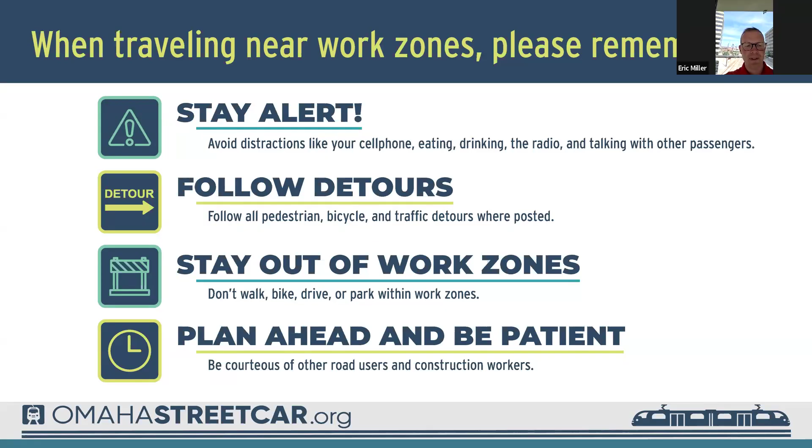As far as the Streetcar construction schedule, we're getting to the end of utility work on the west end, getting into utilities on the east end. Harney Street Bridge over I-480 should be done by the end of the year, and we'll start on Farnam Street Bridge after that. And I think most exciting coming up is the mainline track construction that we're planning to start early next year.

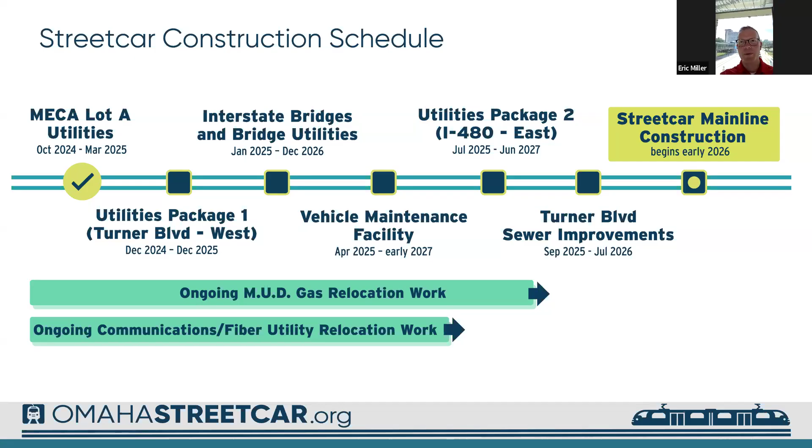So now I will turn it over to Megan to discuss the MUD work. Good afternoon, everyone. So our first slide is our phase 6 in the Old Market.

Gas main installation work continues on 16th. We anticipate this to be completed in the next 2 to 3 weeks. Then all available street repairs will be turned over to the city. Gas is available on the new main to 16th Street, so individual gas services can be reconnected to the new main. The service reconnection work may include additional excavations along the route. MUD continues to work with customers to relocate gas meters to the exterior of buildings for safety reasons. This phase's anticipated completion for main installation remains around mid-September, so gas service work could continue for a while as we work with our customers.

After all services are reconnected to the new main, the crew will come back to cut off the old main, which may include new excavations. As shown on the slide, new excavations will be dug east of 11th in Harney and Farnam to cut off the old main and an old service. Each excavation's work should take a couple of days to complete. Then we'll turn the street repair over to the city.

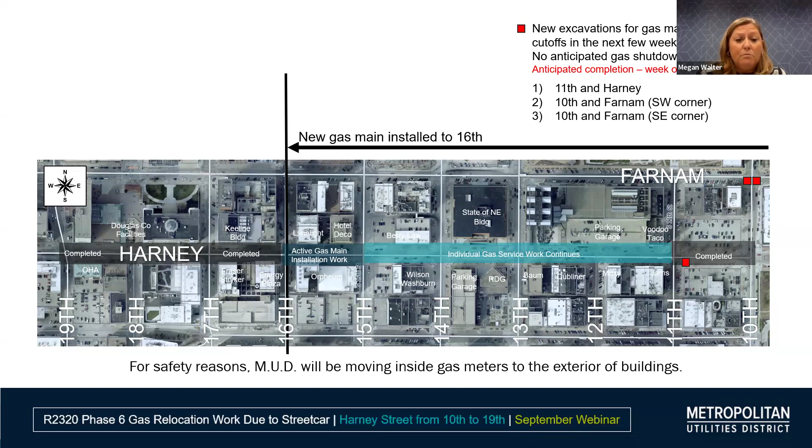Our second slide is phase 5, Farnam Street. The crew at 16th and Harney will move to Farnam at 24th Street within the next month and continue working in phase 5 until completed. Traffic control measures will be put in place for this future work.

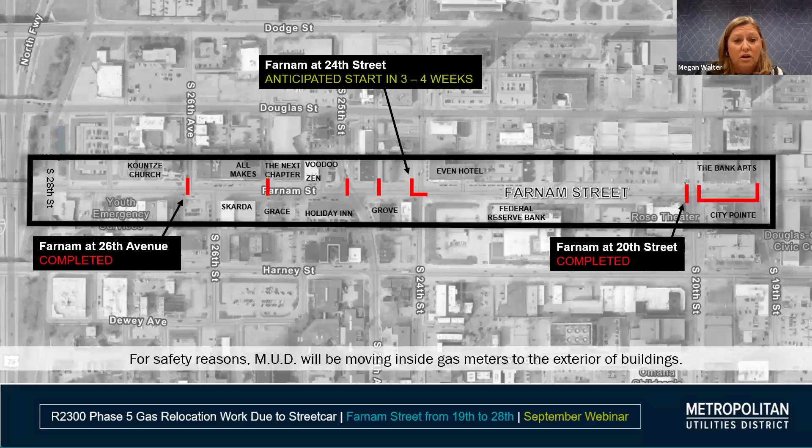Our third slide is phase 7 on Harney Street. Gas main installation work continues near the west end of this phase and will continue east to 24th Street. All individual gas services from 19th to 28th Street will be reconnected to the new main. For safety reasons, again, we will move all inside gas meters to the exterior of buildings.

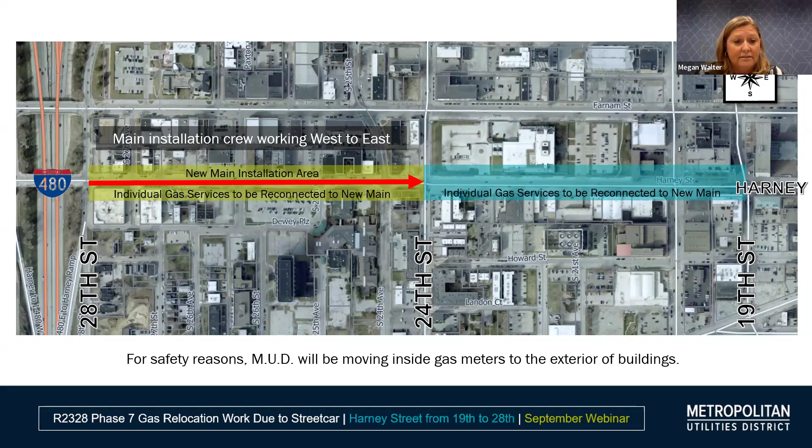Finally, our last slide is a look at all of the phases. Phase 6 gas main installation is anticipated to be completed mid-September. However, gas service work will continue. In phases 5 and 7, MUD work will continue in selected areas, primarily in intersections, to stay ahead of the city's future planned utility work. As shown on this slide, areas shaded in gray represent work completed, while red areas indicate active work zones.

Phase 8 is going to be scheduled at a later date. For safety reasons, pedestrians should use caution where holes have been dug, and vehicles should slow down in construction areas. Thank you.

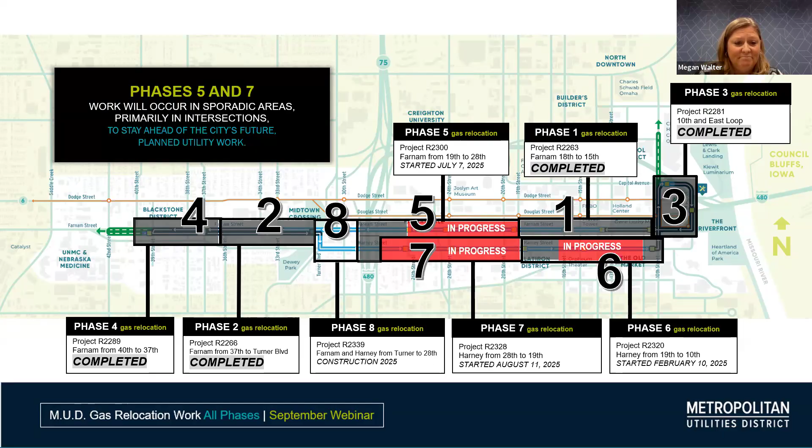Thanks, Megan. Now, vehicle maintenance facility is rolling along fine. We're done with all of our deep foundations. There's 2 photos on the screen right now. Those are some cylindrical piles that have been filled, and you can see them setting up for their first large mat slab pour that's going on.

You can also see in the photo on your right part of the interstate, and behind, roughly a little bit back and to the right, would be the luminarium. Vehicle maintenance facility is continuing along and should be ready to receive cars when they start showing up in 2027.

I believe we also have a question related to the vehicle maintenance facility, Wendy? Yes, the location of it. Okay, yeah, so this is down along Riverfront Drive. It's been moved and is now just east of it, and it's kind of catty corner to the luminarium as you're looking out from the parking lot. Out and a little bit to the south is where the vehicle maintenance facility will be sitting.

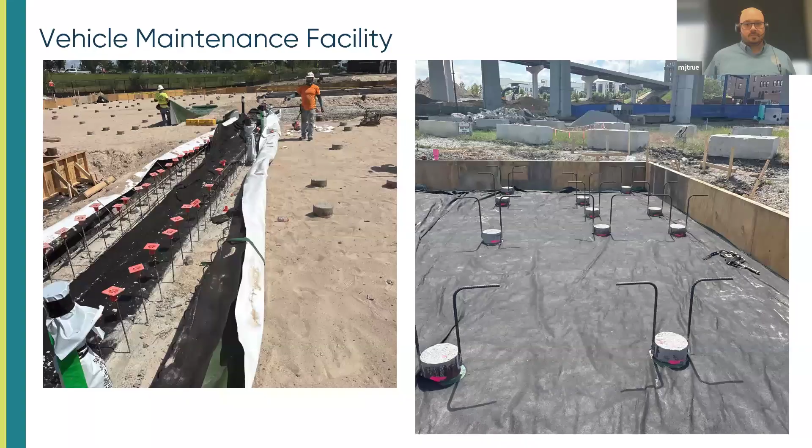Awesome, thanks Mike. So moving on to the West Utilities package. I'll cover this, the bridge, the East Utilities package, kind of all the projects that are active at the moment. So West Utilities package, again, we started way back in January down at Turner.

We're moving west down Farnam. So there's been pretty regular restrictions. We're just seeing a continuation of the same work, similar types of work that we've seen throughout, right? So westbound traffic only on Farnam from 34th through 38th Ave right now. Be aware for traffic restrictions, be aware for lane closure changes.

There's no parking through here, so we want to utilize the parking garage between 37th and 38th. There's the new parking lot at 40th and Harney that has the on-street rate, or if you're at the east end of this area, you can utilize that parking garage. There's the 2 parking garages kind of off 33rd and Farnam there. You can utilize both of those.

Work that we're doing through here, we're continuing to do sanitary and water main work, very similar to all the work that's occurred on this project so far. We are looking to wrap up phase 2 here in the next week or so and really start making that push. You can kind of see we're already extending west, making that push into that last final phase 3. This project's looking to wrap up at the end of the year here.

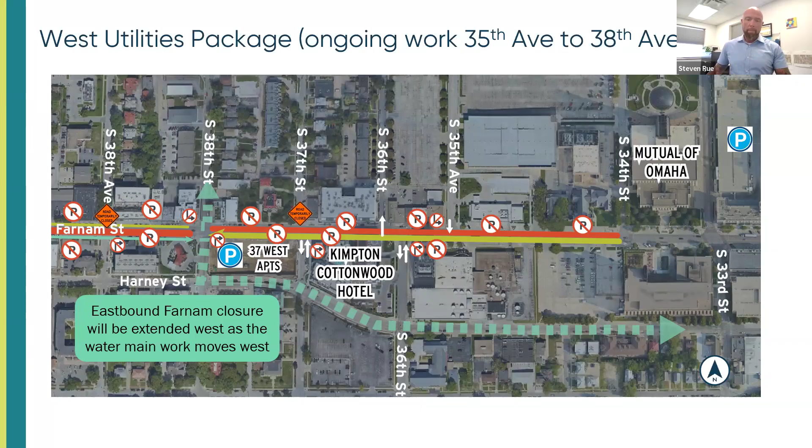The bridge package right now is going great. We're working on finishing up the Harney Street Bridge, which is scheduled to be finished by the end of the year. We're definitely on schedule for that. If you drive by, it looks more like a bridge at this point - it's been paved, we've got the deck, and we're starting to put the appurtenances on. So in the next couple of weeks you'll start seeing barrier rails, fencing, and foundation poles for the street lights. Those things are all coming.

Other work occurring over here: we were able to get the duct banks underneath the bridge that take OPPD and telecommunications from one side of the interstate to the other. Those are complete, so you'll start seeing a lot of wire pulling out there with OPPD and Lumen specifically pulling their cables across the bridge. We've also finished the work at 29th and Harney, so you can resume getting on the interstate there. We've completed that.

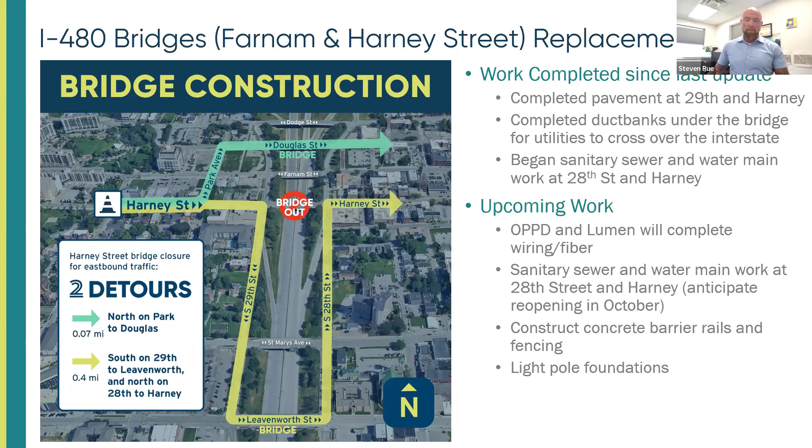Coming off the interstate at Harney, we're not quite done with that yet. We're doing the joint sanitary sewer water main work right there at 28th and Harney, and we're anticipating that to be finished up and opening that intersection sometime early to mid-October. But this project's going great - if you drive by, you can see it's getting near completion.

Then the east package - this is our newest utilities package that we started, and it's also the largest package we're going to do through this series of utility packages. They started on 10th and Capitol. If you've been in that area, you've seen Capitol was mostly shut down. We were critically able to get one northbound lane of traffic open, so when the Lincoln Park concert happened last week, we were able to get all those semis in there for everything they needed. That was great, but we got that done.

On Dodge or Capitol right now, we're looking at wrapping that up in the next week and a half, and then they're going to move up to 10th and Dodge. There'll be additional closures there as they continue the same water main and sewer work progressing towards Dodge - that's one crew working this project. We have another crew starting at 10th and Farnam, which is their next heading for this project. That starts next week, and we should start seeing some lane closures. The following week after that, I believe the whole intersection will go into a full closure, and I think we show that on a later slide.

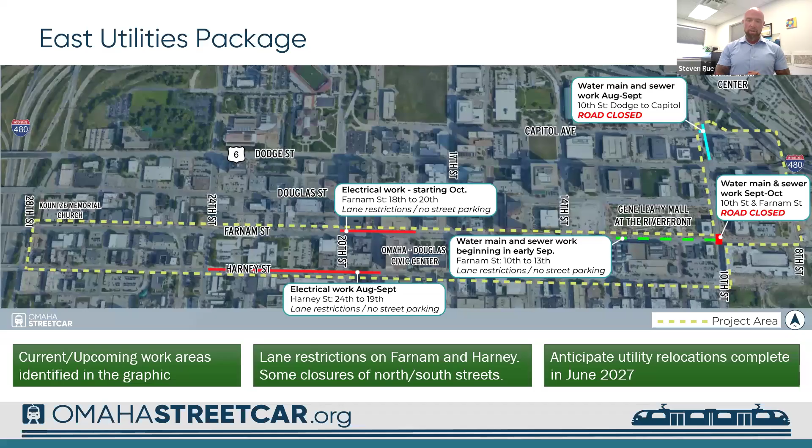From there, you'll see the first crew make their way around this loop and finish this rectangular dashed line area, working around and completing that work. This other crew at 10th and Farnam will start there and work their way west. Eventually, as this project goes on, you'll see work start here at the east end and work its way out west, very similarly to what we did on the West Utilities package. Other work occurring in this same area right now includes electrical work happening closer to 18th, 20th, 24th, 19th on Farnam and Harney - that needs to get done ahead of the utilities package as it moves west. This is going to be a really busy corridor for the next year and a half or so as we try to get a lot of work done through here ahead of the mainline track starting to move in 2026. So a lot of work to do through here.

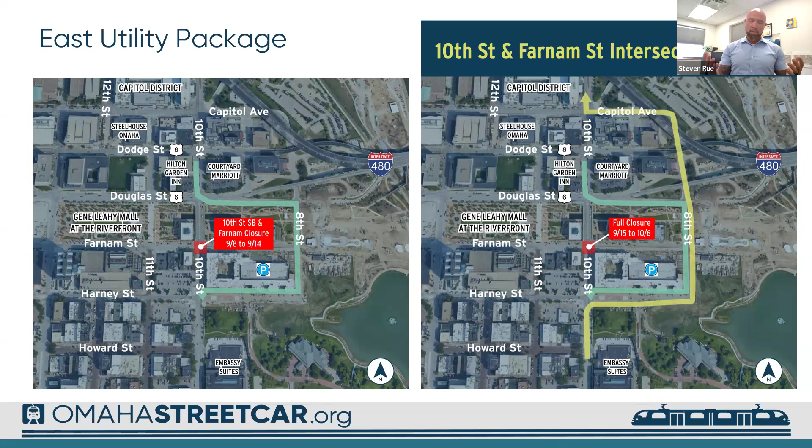We have some diagrams showing anticipated closures and detours. This has been a tricky area, especially trying to get back into the loop that goes towards the Luminarium. We've had some issues trying to get north on 10th, things like that. Here we have the full closures posted, and these are our suggested detours to get around, utilizing 8th Street, working your way up to Capitol, depending on where you're trying to get. Use these detours and your best driving skills as you're going through. If you're driving down a street and there are 4, 5, or 6 signs saying the road is closed ahead, it is likely closed ahead. So use other detours, follow detour signs, do those things that we do.

I'm going to let Mike talk about this one, as we're not quite to construction yet.

Thank you, Steve. This is the Turner Boulevard package, particularly from Farnam Street down to Harney. There are several deep sewers in this area, along with a 48-inch water main transmission line that we're going to start later this year, and it's supposed to be wrapped up by Q3 of next year. The intersection of Farnam and Turner, from January 1 to April 15th, will be shut down. There's a really big sewer manhole there that needs to be reconstructed, and we'll also be utilizing that time to get the 48-inch line through there. We've received the bids on this. The apparent low bidder was Hawkins, and we hope to wrap up any and all the contracting stuff here shortly and get them rolling.

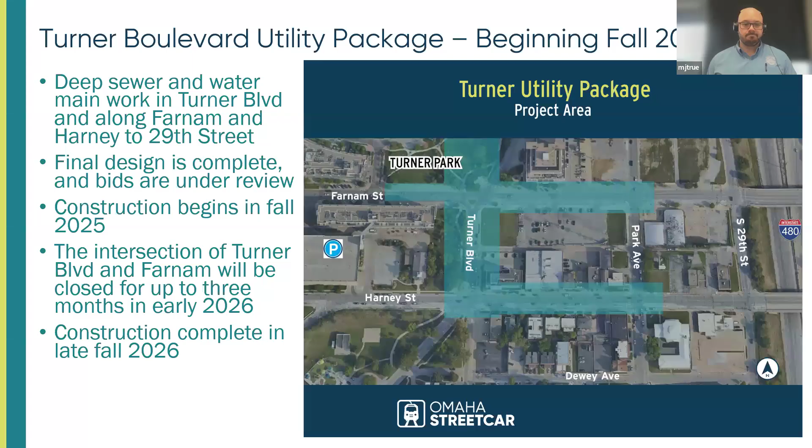Now we're going to talk about business support and what we're doing to help. We're trying to assist people to still find their way to the usual places they go to in the corridor. As far as overall communications, go to the OSA website at omahastreetcar.org. We also have weekly construction update email newsletters you can sign up for. On the website, you can find maps for detours, just like the ones we're showing on screen. Also want to highlight our YouTube channel, Omaha Streetcar Authority, where you can watch these monthly construction update webinars. As far as traffic accessibility in construction zones, we're still trying to maintain at all times: one-way westbound traffic on Farnam, sidewalk access to businesses, and delivery access and coordination. Outside of construction zones, we're maintaining two-way traffic at all times and additional parking, just like normal. Also for parking, try the Park Omaha app - a good way to see what other parking options there are so you can still get to these businesses. We also have signage up to promote businesses, either on the sidewalk or on their storefronts, to let people know these businesses are still very much in operation.

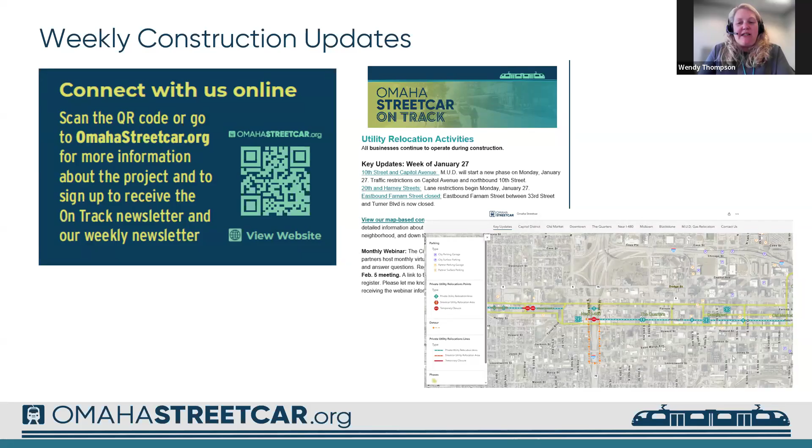We encourage you to share these valuable resources with your neighbors, colleagues, and anyone interested in the project's progress. Our team is here to ensure everyone has the information they need to understand and navigate these changes. Please leverage our resources, reach out with your questions, and stay connected as the project moves forward.

Finally, if you have immediate concerns or would like more information from the project team, please contact me by phone or email.

Now let's begin the Q&A session with questions that have been sent in. So I think our first question is for Steve Rue, and that was, how long will the construction in the intersection of 38th Avenue and Farnam last?

Yeah, so we're still working through the timeline on that. I mean, really at this point, there will be some level of construction through phase 3, but we will move through it in phases similar to other things. So I know that one of the specific concerns, I wonder if it was related to this question, there was an instance where our project closed Farnam and there was a separate project that needed some access off of 38 there.

That has been poured back. There's another part of that project that needs to go on farther up 38th. We're working through facilitating how that's going to work to make sure traffic stays open. But as far as 38th and Farnam being able to go westbound, we're going to continue. That'll be continuously open throughout the project, and you'll kind of see us slide through like we've done with everything else. So there'll be some level of barricades for the next month or so as we move west.

And then following behind that, you're going to have CIPP lining and some other things. So it's hard. I don't want to give an exact date because I'm afraid it would not be accurate, but there will be some level of construction at 38th Street there for most of the rest of the project. Thank you.